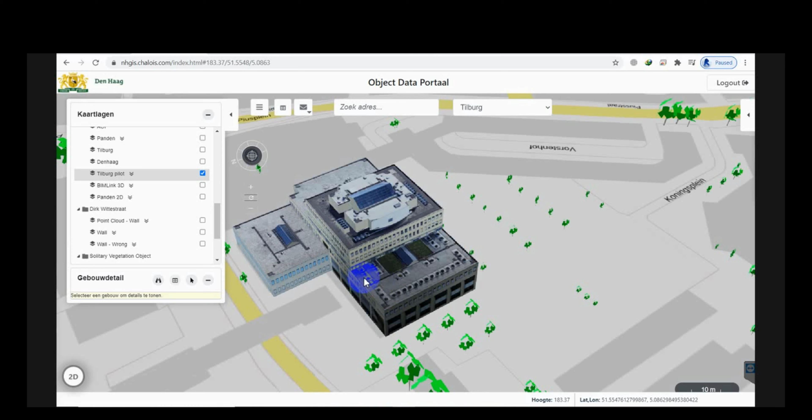So here you can first see in the viewer a textured building of the Tilburg customer, where the municipality building has been drawn using the point cloud generated from the stereo photos. So we first use that point cloud to digitize this building and model it to different levels, and then we use Google Street View to texture it to quite a good extent. You can see in the picture.

So we have drawn the files according to the point cloud dimensions, and then we also placed some trees here. The trees are drawn using the point cloud data and the KRT data. From the KRT data we took the position of the trees, and from the point cloud data we modified their height and the crown diameter. So you can see that different trees have different heights and different widths.

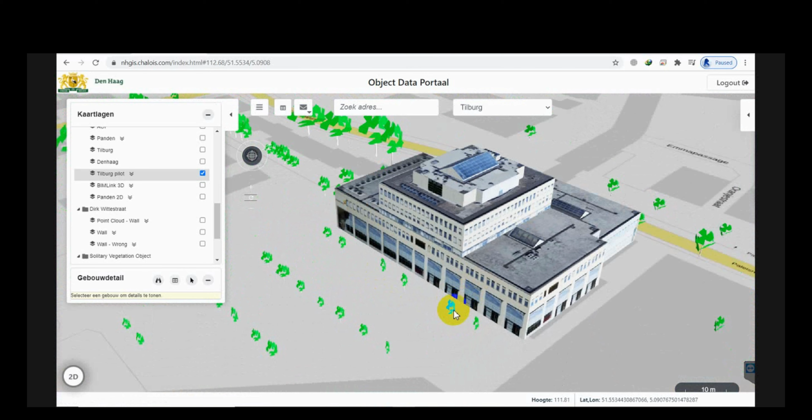And we also have taken the ground height from the point cloud. So there are several trees here, you can see, that have personalized height and ground contour.

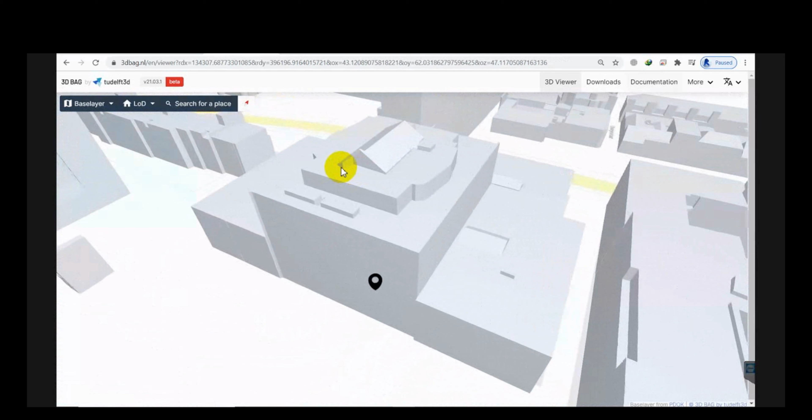And also with respect to the 3D BAG viewer, you can see in the 3D BAG the same building I am showing right now. So this building has some flaws. With the 3D BAG viewer, we expected that it was generated from an automatic system. So you can see this should be a straight line. This spike is not allowable. Also in the slope of this area, you can see there is a spike. So we removed those kinds of errors in our data portal. So it's quite smooth, and it's in the level of detail of 2.

So also we have created another city model for the Alkmaar customer. So you can see that in this portion we have also textured the buildings in different levels. The textures we prepared with the help of the stereo generated point cloud, and we textured it with respect to Google Street View. And in this portion we didn't create any trees, you can see.

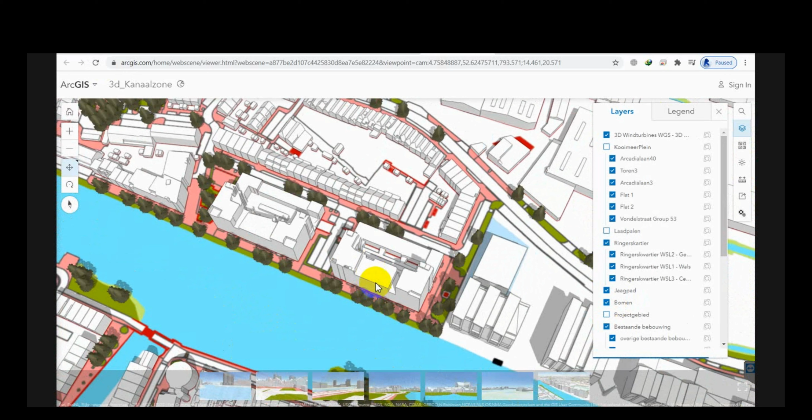Okay, here you can see that this is the ArcGIS Scene viewer created by the Alkmaar government, where they modeled the buildings according to the point cloud. And here you can see the buildings are not quite finished. There are some errors. You can see that there are some spikes and other things on the buildings that need to be removed or modified.

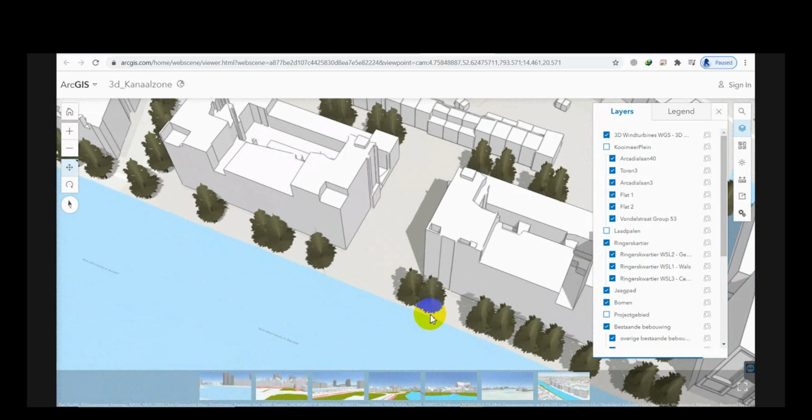And also the Alkmaar viewer from ArcGIS has trees, where they used a generic tree placed in every single position, and these trees are not modified according to their height and their crown contouring. In our viewer, the trees are drawn differently according to their height and their crown contouring.

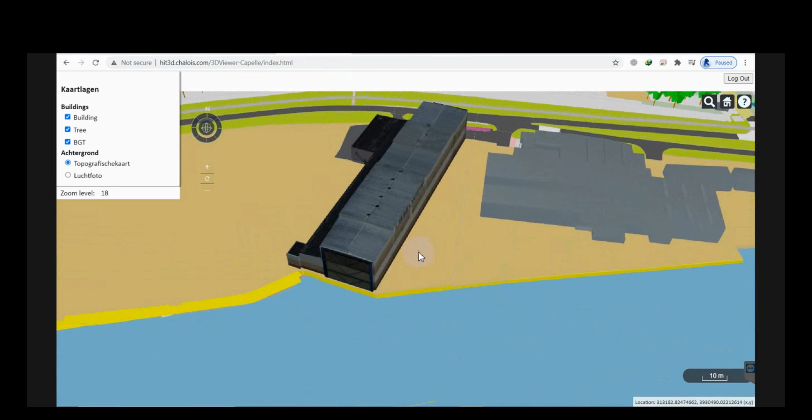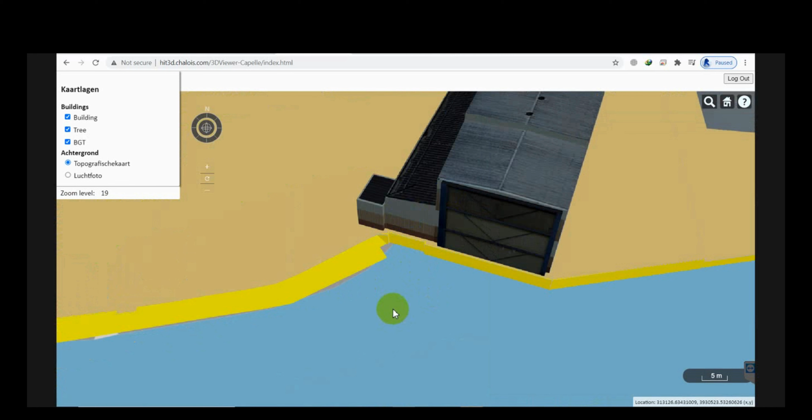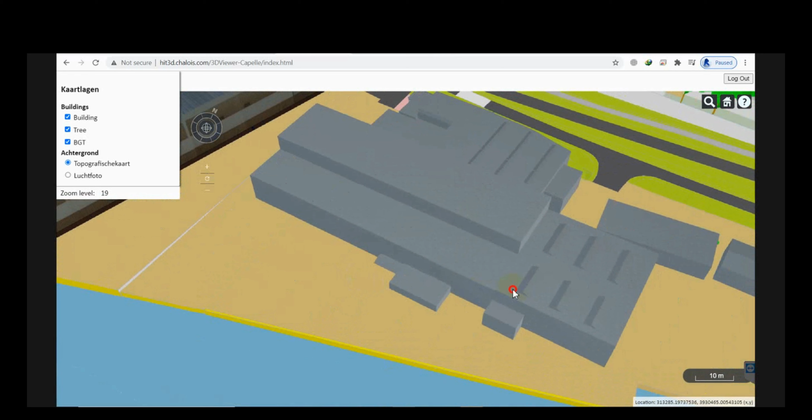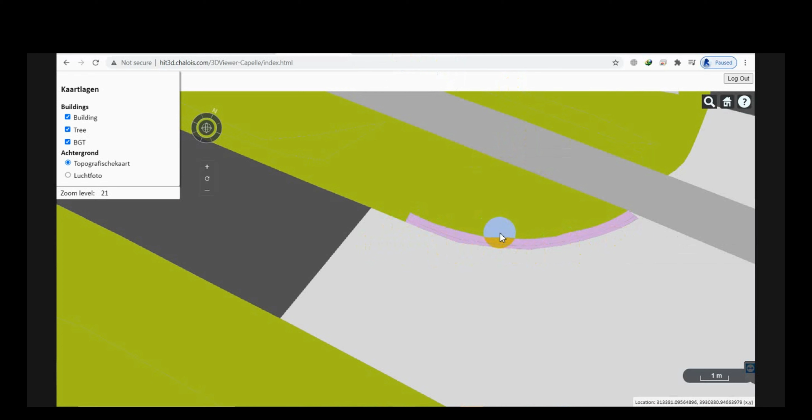Also here is one building we created the texture for, and others are not textured. And according to their BGT properties, the contours are colored here. So every contour is different. Here you can see the curb angle.